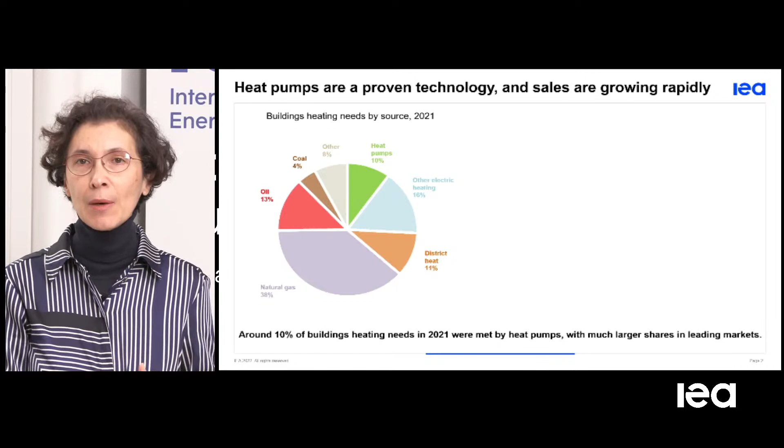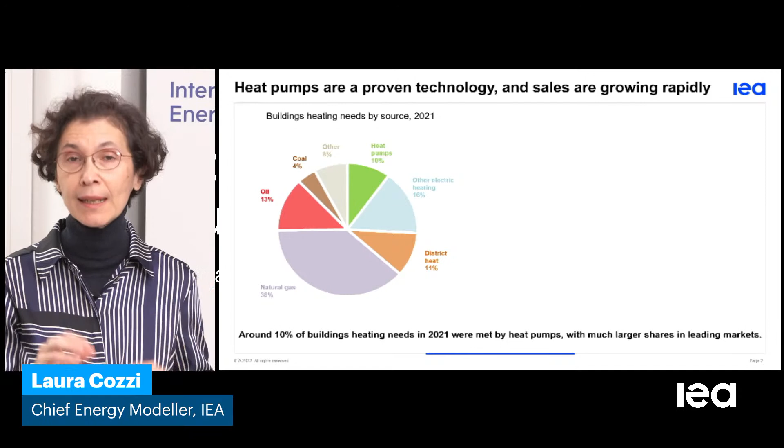Maybe something we didn't ask ourselves very much before the global energy crisis hit us at the beginning of this year: in which way do we heat our homes, our schools, our offices? Actually, globally, most of the production of heat is coming from fossil fuels. More than half of our buildings in the world are heated using fossil fuels, mostly natural gas. Heat pumps account for only 10% of global heat production in buildings.

Other sustainable solutions with larger shares include, for example, district heating at around 11%, a very important area that is also growing very fast. However, what we have been noticing over the past couple of years is really an increasing, very large momentum in the sales of heat pumps.

In 2021, globally, the amount of heat pumps sold grew at 13%. We have never seen this number before. To give you an order of magnitude, this is twice as much as what we have sold on average over the past decade.

As you can see here, many European countries are leading with incredible numbers, Poland and Italy at 60% of sales growth. On average, the European Union is growing very strongly at 35%, and this was last year. The data coming in for the beginning of this year is very similar, with very strong growth expected for this year as well.

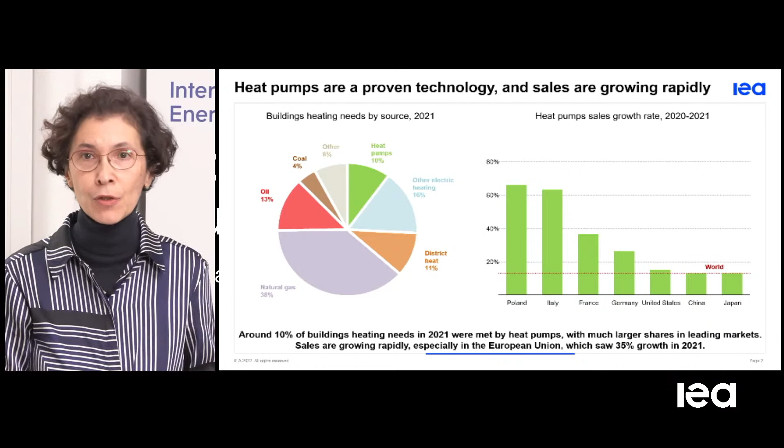As Dr. Birol mentioned, energy security and affordability concerns in the minds of all consumers are pushing sales to new high levels. So what is our expectation now globally for this market of clean energy technology for the heating sector? If you look to 2030, our expectation is a tripling globally of the sales we are seeing in 2021.

This is happening at the global scale everywhere that is looking at more sustainable heating solutions. China is very much leading there - by 2030, China by itself will be larger than the sales we are seeing today. But second there is Europe, very close to North America, each taking a quarter of the sales.

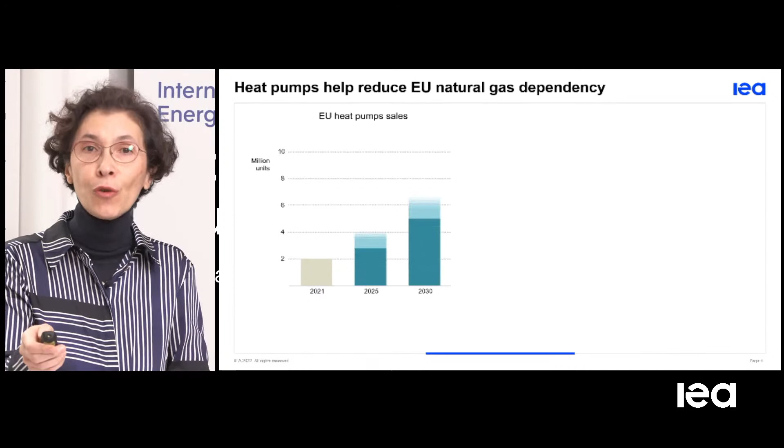Let's zoom into Europe for a second. There were record sales in 2021, with 2 million new heat pumps sold. Our expectation is this could double by 2025 to 4 million, and grow even stronger to around 7 million units by 2030.

In many cases, we see this happening together with the building renovation wave, because this makes the heat pump needs smaller - you buy a smaller appliance and it makes your energy bills more convenient. Why is this even more important for the EU? Today, natural gas use in buildings for heating is the largest consumer of natural gas in Europe, so tackling the heating habits of Europeans is all the more urgent.

We've seen the global numbers a second ago - 10% of global heating needs are met via heat pumps. In Europe, we are slightly behind on average, only 8%. With the type of development we are expecting over the coming years, we are actually catching up, and by 2030 we would be more than doubling the share of heat supplied by heat pumps, reaching nearly 20%. To give an order of magnitude, this is the level the United States has already today.

What are the implications of this type of deployment for security? They are very, very important. Dr. Birol mentioned them earlier. Already in 3 years, you would have an amount of savings similar to some of the major pipeline suppliers to Europe, like the Trans-Adriatic pipeline. By 2030, we would be talking at least 21 BCM - to put this in context, that's 15% of what Europe was importing from Russia just a year ago.

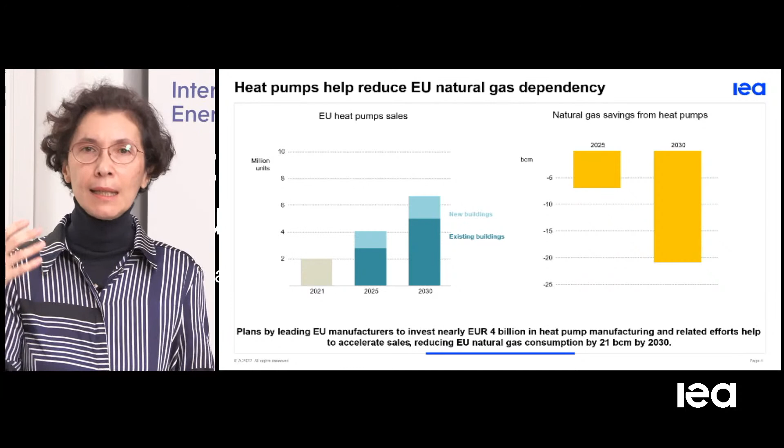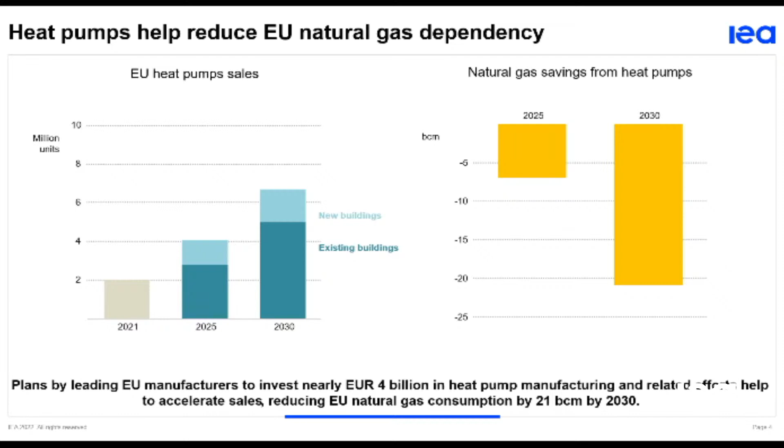And this, why do we say at least, is because we also see potential beyond buildings for industrial heat pumps, in particular for low temperature heat in the food industry, the paper industry, and the chemical industry. Over 3,000 facilities in Europe today could, with not major changes, switch to heat pumps, and with the right policy setting around it, we could increase savings by another 12 BCM.

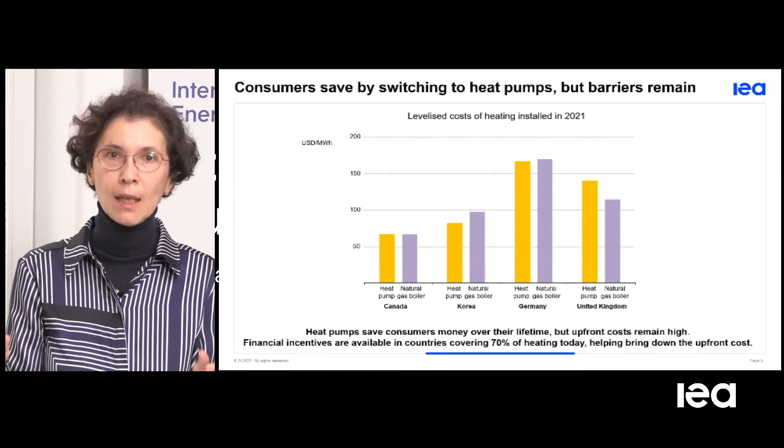Now let's look at what are the barriers and the current policy setting. First of all, the policy setting and momentum around heat pumps have never been larger than today. We are monitoring over 30 countries that account for 70% of global heat demand that have policies in place to accelerate heat pump deployment. This is huge.

What type of incentives do we see? There are incentives that help consumers lower the upfront cost. Why is that needed? As you can see here, we are showing across several geographies from Asia to North America to Europe how the cost of heating your home compares over the lifetime of either a natural gas boiler or a heat pump. Overall, you are paying about the same whether you have a gas boiler or a heat pump. However, today, for some technologies, the upfront cost of a heat pump can be 2 to 4 times larger.

This means consumers will face this higher cost, and this is where we see the policy needing particular attention. Dr. Birol mentioned this earlier - especially lower income households are the ones that for us should really be targeted first.

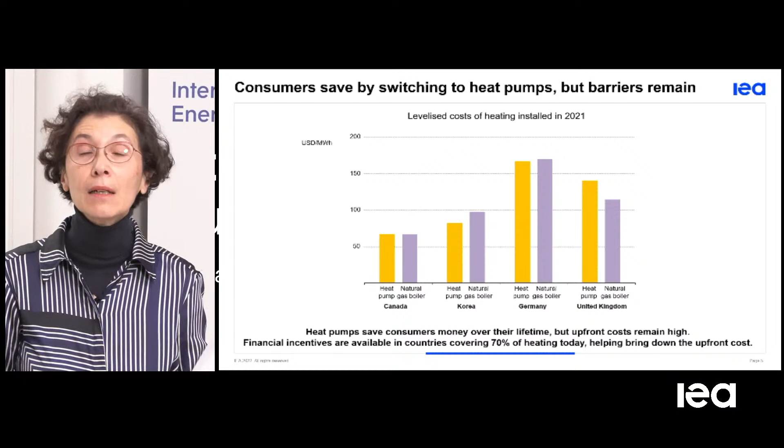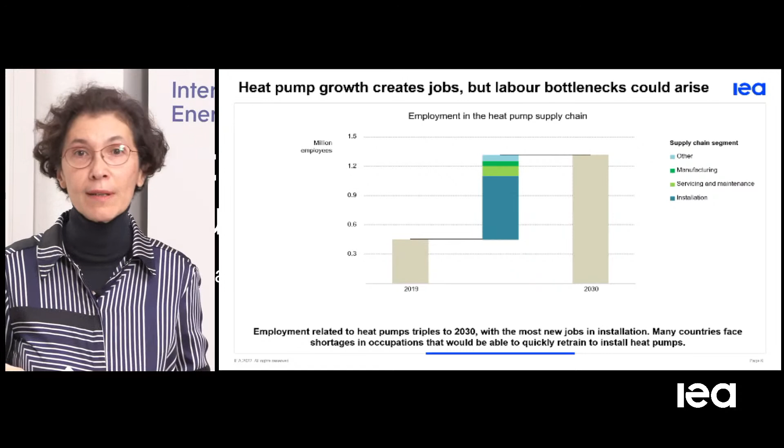So this is one area that requires attention, both from companies but also from policymakers, in particular retraining existing skills for heat installers in general, but also electricians and plumbers, who could be retrained to fill the shortage of labor we are currently seeing in these specific sectors.

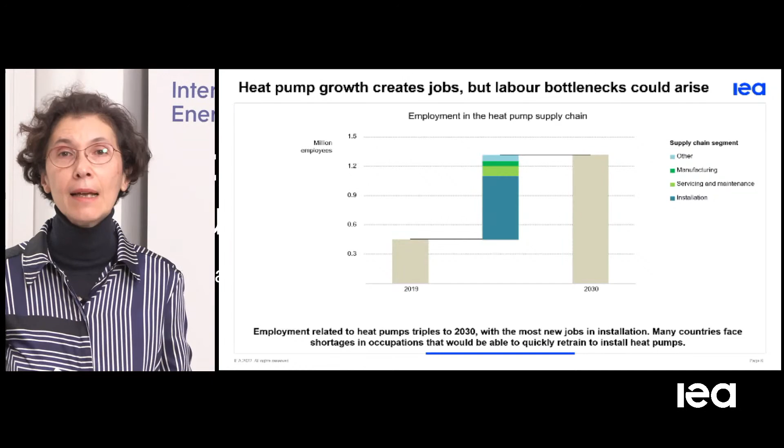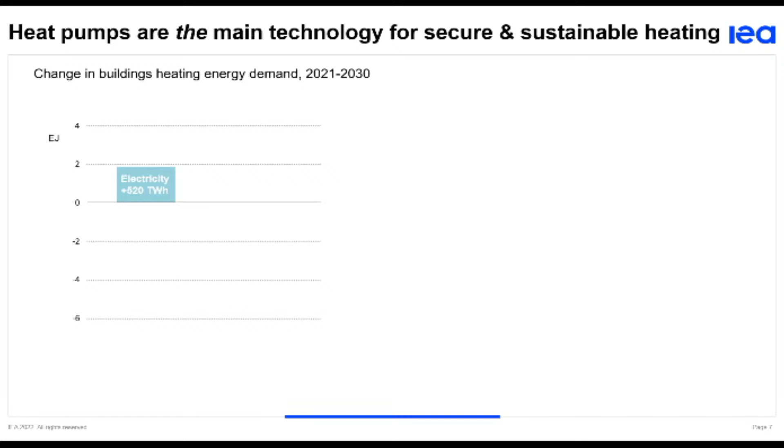And finally, we have been discussing what this huge heat pump deployment means for global energy trends. First of all, it creates an increase in electricity demand. In our assessment, this is well managed and very manageable if there are two conditions that take place.

First, push the heat pump deployment together with energy efficiency in buildings. This reduces the peak demand for electricity and enables a secure transition towards a more electricity-driven sector, together with careful grid planning. The benefits there are huge.

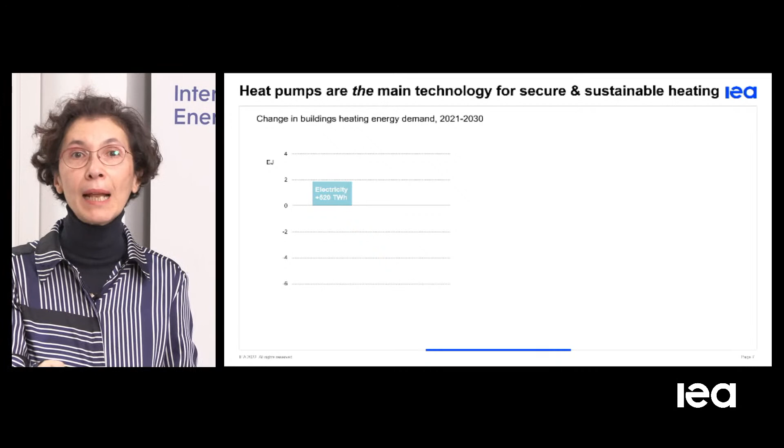As you can see very clearly here, the switch to heat pumps has a very positive energy balance. You reduce overall energy consumption because heat pumps are much more efficient than conventional fossil fuel boilers. A couple of overall numbers here.

In very tight energy markets as we are living today, the savings we're seeing in oil, 1 million barrels a day by 2030, is very significant and could bring relief to markets. At the same time, for global natural gas markets, savings of 80 BCM.

Let's conclude with savings in terms of environmental considerations. As you can see, there are places in the world, in Europe, in China, where some heating is still done through coal. The moment this coal is taken out of the system, there are immediate health benefits and local pollutant benefits that are significant. But the largest important environmental benefits are on CO2.

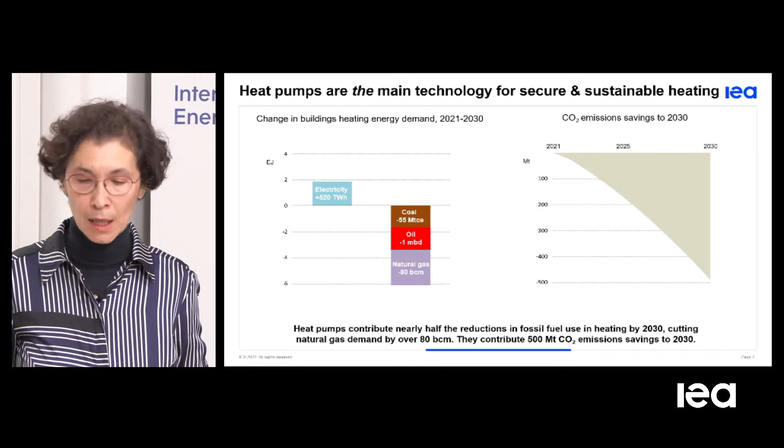Our assessment is that this type of tripling we're talking about in sales by 2030 could actually decrease emissions by 2030 by 500 million tons. This would be equivalent to the emissions that Canada has today, or for a European audience, like taking away all the cars from the roads in Europe today. So very, very significant savings.

Let me conclude with a final word on the feasibility of this scaling up. The tripling we're talking about in sales and overall heat pump installations would be significant, but not as large as the scale-up of other clean energy technologies seen in the past. It would be lower than what we've seen for solar PV or even electric vehicles, and we consider this completely within the realm of feasibility, achievable within this decade if the right policy settings are put in place. Thank you.